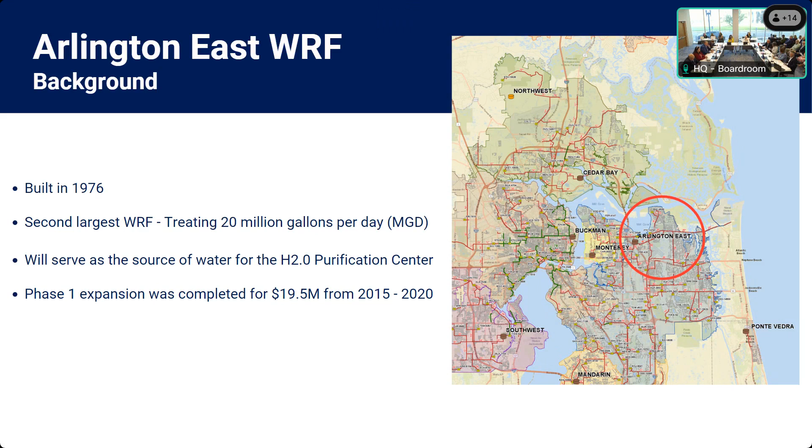Phase 2 of the plant expansion includes the upgrade of the influent structure, the aeration basin, the primary clarifiers, and the blowers. The influent structure, including the screens, the concrete structure, the influent and effluent channels, and the piping, are facing severe corrosion due to high levels of H2S, hydrogen sulfide gas.

The aeration basin, the primary clarifiers, and the blowers are undersized, so we have a hard time reaching our nitrogen reduction limits during the winter months and during peak storm events. So phase 2 will completely replace the influent structure, add a new aeration basin and blowers, and replace 2 primary clarifiers.

The design was completed by Hazen, our engineer, and was advertised for bidding in November of 2023. In January of 2024, JEA received 1 bid from Wharton Smith.

The bid was $96,857,000, 20% higher than our estimates. Subsequent reviews showed that the estimates undervalued the prices in materials and labor, and failed to account for additional efforts in site work excavation, shoring, and dewatering.

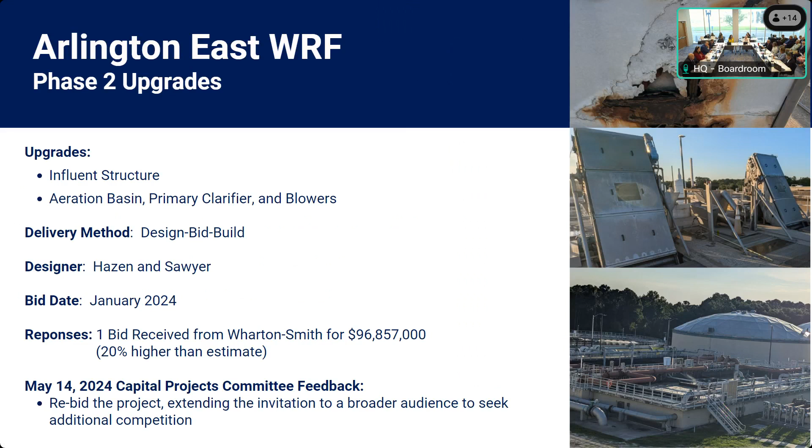The plan is to create a targeted advertisement plan to reach contractors, including those with local presence in markets outside of Northeast Florida, to hold a series of workshops with contractors to discuss the project and understand market challenges, to hold site tours and open house events at the facility to allow potential bidders to gather additional information, and to extend the solicitation duration to allow contractors plenty of time to bid.

The risks include low participation by potential bidders, as we experienced before. Large contractors that can bond and perform this size and scope of work do not often participate in hard bid solicitations. There is so much work currently available, they may simply bid elsewhere.

Option 2 is to break the project into 2 distinct projects and bid separately: the influent structure, and the aeration basin, primary clarifiers, and blowers. This will allow smaller contractors to be competitive and have the bonding and labor capacity to complete the projects. The engineer would need to revise the drawings and specs to develop separate bid packages.

The risks include increased cost and duration due to increased efforts in project management, engineering, coordination and construction, and loss of economies of scale.

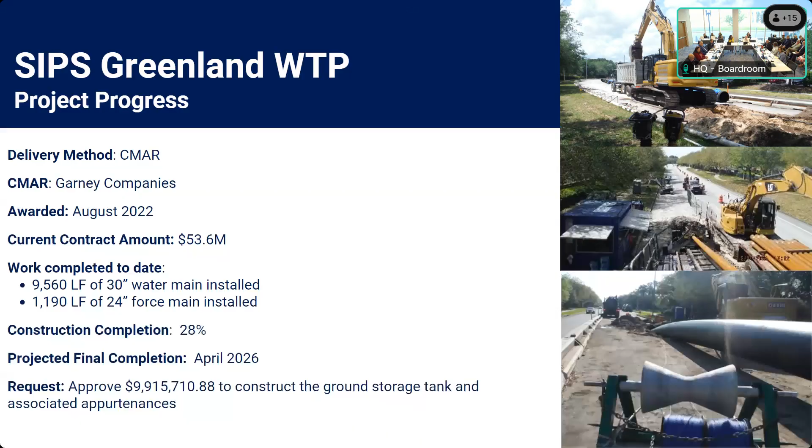That pipeline segment stopped around the Southside Boulevard Bradley Road area. So the SIPS program is, if you want to call it, a phase 2 of TWMP, but we named it different to help disassociate itself, but it is ultimately a continuation of moving water from the Main Street and North Grid to the South Grid.

So the actual Deerwood pipeline project was the first one that was started. It connects to the pipeline that was stopped under the TWMP program at Southside Boulevard Bradley Road, and then it's a continuation on down. So it's a continuation of the TWMP program that was done, which included the river crossing along the Mathews Bridge.

This is going to sound so basic that you may laugh, but is the reason we're doing this because the wells are more powerful and better suited in Main Street, or the ones on the south side are just getting stressed and need the help? Can you kind of explain the process?

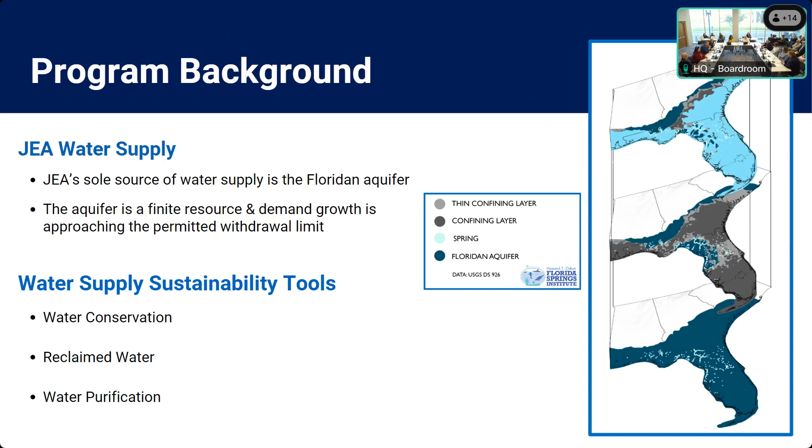It's cheaper than desalination, but not cheaper than just pumping. Correct, our cheapest supply right now is the aquifer. So when we reach that permit limit, any option is going to be more expensive than what we have now - it'll just be a smaller portion of our supply. I remember years ago there was a big debate because Central Florida was withdrawing from the river. Now is that another option? It is an option, but it's variable quality, so this supply would have a more consistent quality, which would make it less complex to treat. How about cost? Cheaper. Because it doesn't have that variability in quality.

So when our consumptive use permit was issued in 2011, we started having discussions with the Water Management District about what that next allocation of water would be. That led to us doing a plan with them in 2014 and led to JEA developing a 3-phase program for this. Phase 1 was from 2016 to 2019, and that was pilot testing. What we wanted to do was evaluate available technologies out there being used around the world for this application. We did a lot of laboratory testing, and that was all about ensuring protection of public health. That's when we also developed our initial communications plan. That was a cost share with the Water Management District for that portion of the work.

We're now in phase 2, which is demonstration. This is about optimizing the performance so we can make it more cost effective when we go larger, training staff on this new equipment, and then a visitor center so that we can engage the public and show them what we're doing with this. That is also a cost share with the Water Management District for this portion of the project, and that's what the second half of this presentation will be about. The third phase is implementation, so we'd be able to apply this full scale as demands increase in the future.

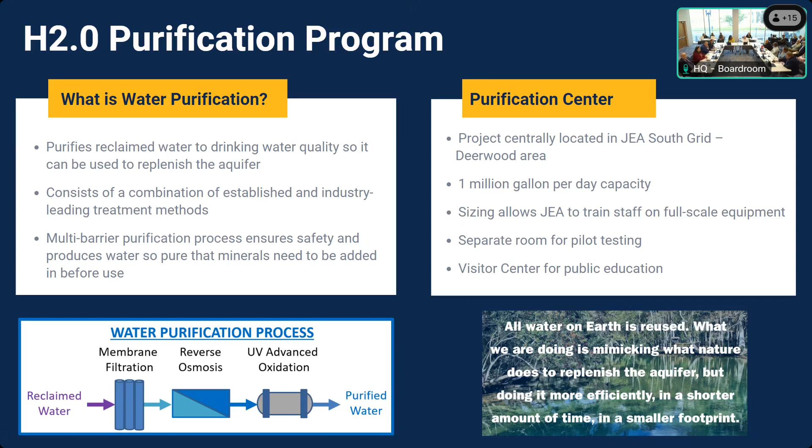Next slide. So the technology is there right now for this process, is that correct? Yeah, these projects are in a number of different places throughout the world, where people have water supply need challenges. Singapore's got a great program. The world's largest facility is in Southern California, where they purify and replenish their aquifer with more gallons than we treat and produce for our drinking water system today. So these have been used for decades, yeah.

But it's basically RO, reverse osmosis, which has been around for a very long time. But it's expensive. Relatively, when you compare it to other options, the cost has come down since RO was invented and used over time. There's been efficiencies in the application of it.

This purification program has a number of significant benefits for us and our environment. It's the most economical supply option that we have. It provides us with long-term water supply resiliency. By replenishing the aquifer with this water, it not only increases the quantity down there that we can withdraw, but also improves the quality of that aquifer supply. It provides long-term assurance of water for future generations.

This is the only option available that not only solves a water supply need, but also helps us reduce the volume of water discharged to the river. As part of our integrated water resources planning, this is the solution, as well as what you've heard with Senate Bill 64. This is a key component because now we're reusing more of that reclaimed water and reducing the discharge to the river.

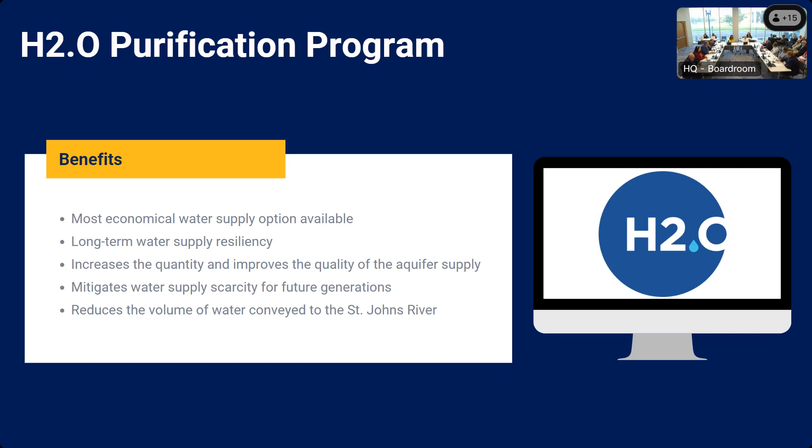So moving on to our purification center, we chose a progressive design build delivery method that was awarded to the Haskell Company and their partner Black & Veatch as their engineer. That was in October of 2019.

The board approved the property purchase for this site in September of 2021. We're currently at 30% completion. You can see the photos on the right of the walls and piping in the ground.

Final completion is scheduled for October of next year. Current contract amount is $78.9 million. This request is to approve $4,639,615 for a degasification and remineralization system, associated appurtenances and finishes. This work was in the original scope of work and it's in our budget. It just took the contractor additional time to develop these to the point that they could bid them.

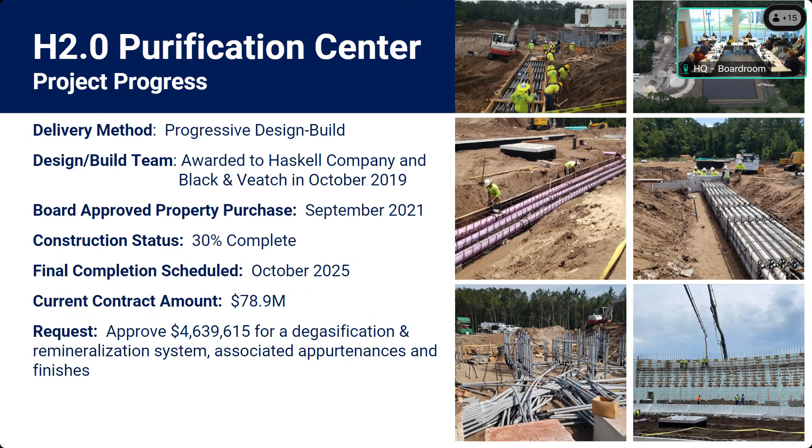Where exactly is this facility? It is in our South Grid, off of Southside Boulevard, just south of JTB.

Staff is requesting Capital Projects Committee recommend the board approve an award to the Haskell Company for the H2.0 Purification Center. This award includes the construction of planned and newly designed degasification and remineralization system, associated appurtenances and finishes in the amount of $4,639,615, for a new contract amount of $83,506,772.37. Ryan, have you all reviewed this for competitive pricing?

Make sure you're okay with these numbers. Yes, the pricing for this came in about 30% lower than what our estimate was.

Praise the Lord. Move approval. For once. We've got a motion. I second it. All in favor? Aye. Thank you. Thank you.

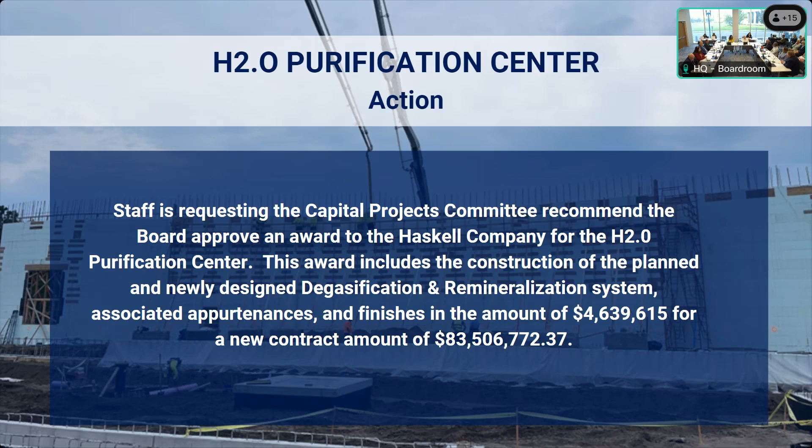Back to you, Ray. Thank you, Chair Baker. So this project right here, this is a new project, Northwest Water Reclamation Facility, which is in the planning phase. We're bringing this to the committee not as action, but as information, for awareness, so you know that this is happening.

This new facility is to support growth in Northwest Duval County. The initial size is 2 million gallons per day. The planning level estimate is 120 million, and it's projected to be online at the end of 2028. The projected build out for this facility is 9 million gallons per day.

As far as design is concerned, the engineer that has been selected is Hazen and Sawyer, and their services will be conducted in 3 phases. The first phase is preliminary design, with an award amount of about $2.4 million. After that is phase 2, the more detailed design, where we'll determine what type of delivery method will be utilized. We'll be coming back to this committee for input.

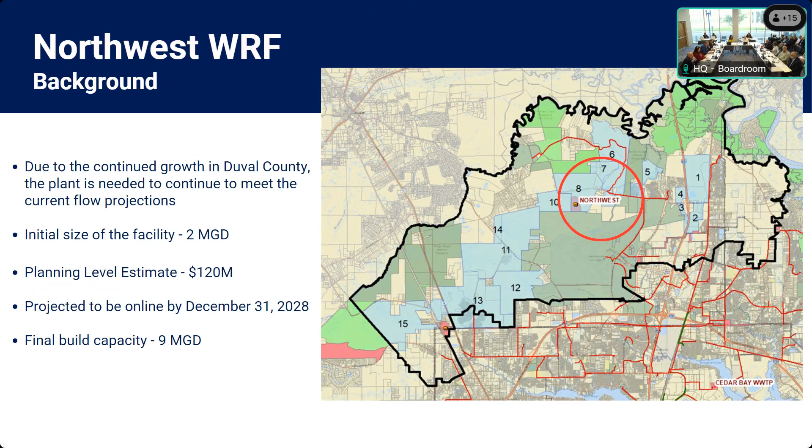Okay. All right. Ricky, morning, morning. Chair Baker, members of the committee, I'm Ricky Erickson, Vice President Electric Systems.

Hear me okay? We're on. To make sure everybody hear me. Yes.

Here today to present an update on a combined cycle, kind of moving to the design phase. So I'm here substituting for Pedro. He has an obligation he couldn't get out of today. He is performing his civic duty today. So I'm here pinch hitting for him.

We'll give you an update of our plan, and Kevin will also talk about the greenhouse gas rules, some of the potential impacts of the greenhouse gas rules, and we'll go over some of the market test observations and considerations that we're going to be going through as we go through this process.

So we have some significant milestones and activities going on. After the March 26th update, the team continued with the implementation plan and assessment of the new greenhouse gas rules and their impact on JEA. The main objective is to inform the Capital Project Committee of the next market options, the request for proposals, and how JEA is accounting for the new greenhouse gas rules in the need for power process.

This graphic, which was provided at the March board meeting, illustrates the significant activities related to the project, plan timelines, and when the Capital Project Committee and board should be receiving updates from the team, as denoted by the green diamonds. The gray status shows where we brought it to the board in March.

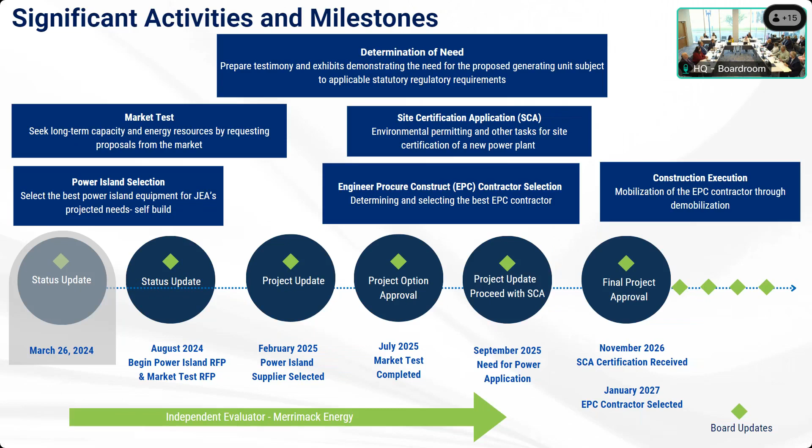I thought we were still evaluating, making sure that this was the best approach and so forth. It is, this is part of that approach. So by doing this, we can compare and send to the market what we have established, so we can see if there's any more competitive projects that can come in and maybe beat it. So this is kind of a standard to evaluate against. All right, this is still the evaluation stage. Still evaluation stage, okay. And the assumption based on what these things cost is that we think this is going to be the best solution. And I'm leading the witness a little bit, but the greenhouse gas regulations that have come down from President Biden throw a monkey wrench in this. It has forced us to do some more studying to see how the impacts are going to impact us in particular, and that's what Kevin's here to go over.

Okay, I just wanted to introduce you properly. Thank you. Yes, this is Kevin Holbrooks, Director of Environmental Operations. Just a quick refresh - I know we touched on this at the last meeting and everything about it, and just wanted to do a real high-level recap.

It's about 800 pages, we're going to do it in one slide. Bottom line, on new combined cycles, you're going to be limited to 40% capacity. That's how much you can operate the unit, unless you install carbon sequestration.

As I indicated before, on carbon sequestration we're undergoing a study right now. We just initiated it to determine the feasibility of carbon sequestration in our geological formation in Northeast Florida. If it's feasible, that's great, we could probably inject it underground. If it's not feasible, then how much is it going to cost us to pipe it if we had to do that?

The good news about this rule is there's flexibility. The models seem to indicate that we still need a new unit, even if it was capped at 40% capacity. The good news is if carbon sequestration is viable in the future, we can install it and increase that capacity factor to 100% if we needed to.

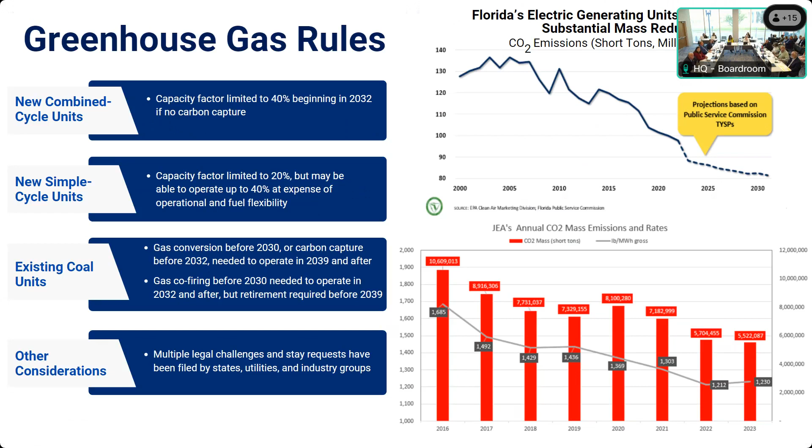Oops, do we- can you go back? When we buy off the grid, do we figure in the carbon on that, or is that a freebie?

Interesting point. On other pollutants, it's always the source, the generator, that's responsible for those pollutants. And that's kind of how we've done the greenhouse gas, so it comes from the generator. It's actually from the source, it's source specific.

I don't know, that could change. The rule doesn't specifically state anything about that, who's ultimately responsible. So just keep me from being confused.

The 45% we've saved doesn't take into consideration the fact that we're buying it from FP&L and bringing it up. I mean, is that how we saved it, by buying it from FP&L instead of just producing it ourselves?

Well, Ricky can answer the capacity situation, but getting rid of the coal units, which are higher producers of CO2 emissions, and using Brandy Branch and our natural gas units more has caused savings in this. Yes, there are some purchase power agreements you could point to, but out of that 40-45%, maybe 10% is because we're purchasing power, and the other 30% is because we've reduced emissions from our own facility.

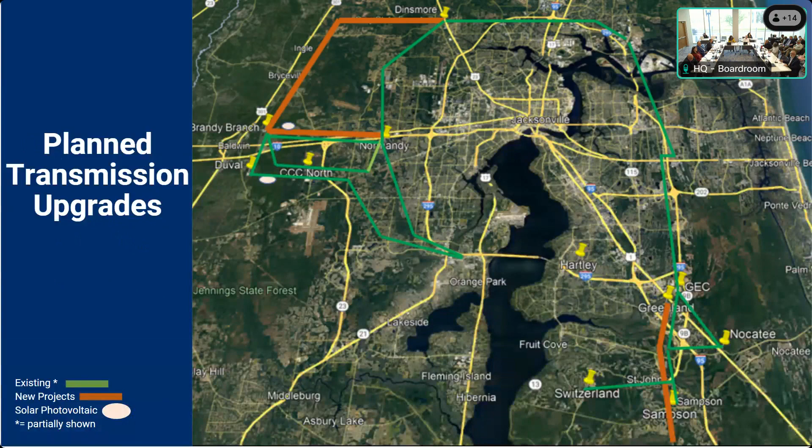So this is our planned transmission upgrades. This is one of the ones coming from west to east that I mentioned. It continues to be a concern as we import more and more power. We interconnect with one of our peers, FPL, on the west side of town. It's a 500 kV system that we own part of, which we talked about earlier. This is where a lot of our import energy, market energy, comes in basically from the west side of town. As we continue to depend more and more on the grid, this yellow line represents our facilities between FPL and ourselves, where we import a lot of our energy.

As we continue to import more and more solar resources, this corridor tends to have more and more contingency problems. The study identified this as a potential area which needed to be mitigated. One of the mitigations for this is to increase the capacity of these lines. The existing corridor is already established, so no real estate should be needed. These lines will just be increased capacity to ensure that we can import the energy that's in our plan.

The yellow ones are where we're beefing it up, and the green's just existing facilities, sir.

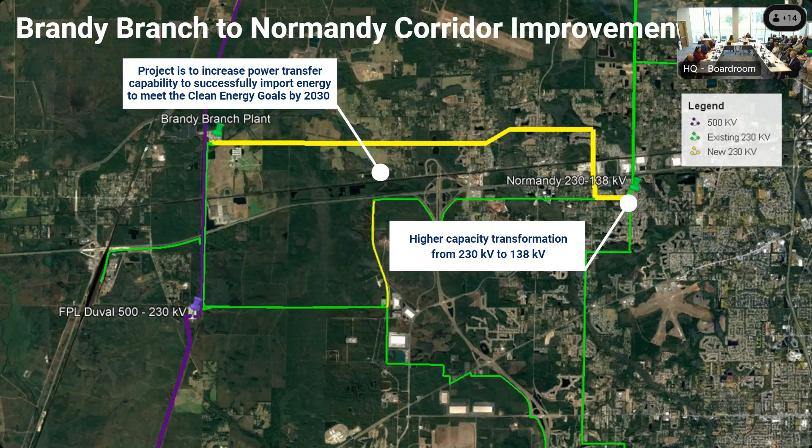That is not the only issue in getting power from elsewhere outside of our system into our system. So upgrading those lines helps, but creating a diverse path is really the way to handle all those particular contingencies associated with that item.

So this project would produce a separate, diverse geographical path to import power into our system. This is from basically Brandy Branch to Dinsmore, which is a 230 line being proposed to inject power directly into our system around Normandy. Normandy is where these lines are going today, and it's been one of our lifebloods for years. As we import more and more power, and that's what the 2030 IRP shows, we need another diverse route to ensure reliable transmission of that power. So that's what this project is - to create a path somewhere from the west side around our system into a new injection point to get it to our customers.

And we have to buy the land for that? That's a real estate acquisition, yes, or an easement. We may have to go down public right of way or down a road or buy some sort of real estate. How far along in the planning are we on that? Very, very initial stages on this one. We haven't bought any right of way, nor have we done any design on the line yet.

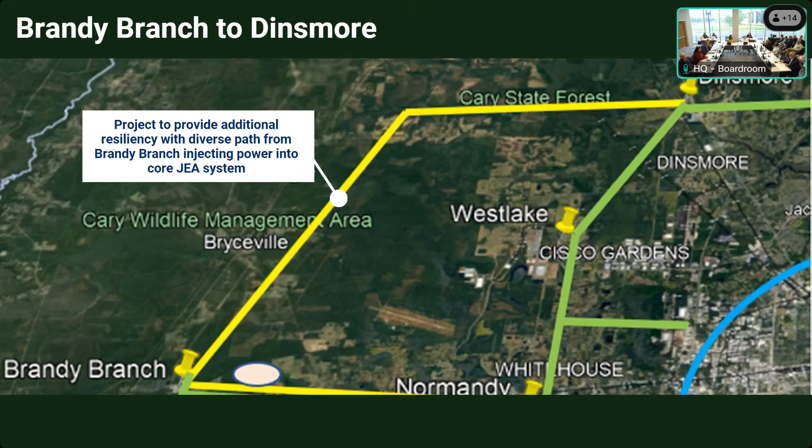So also to increase that import capability on the south side of town, we'd add a second tie line to our FPL counterparts south of us. While the majority of it comes in from the west, some comes in from the south under these scenarios we're talking about with increased imports. So another line on the south end of town is being identified as a need to ensure we comply with all the contingencies that are studied. And again, this one hasn't been designed, this is just in the planning phase.

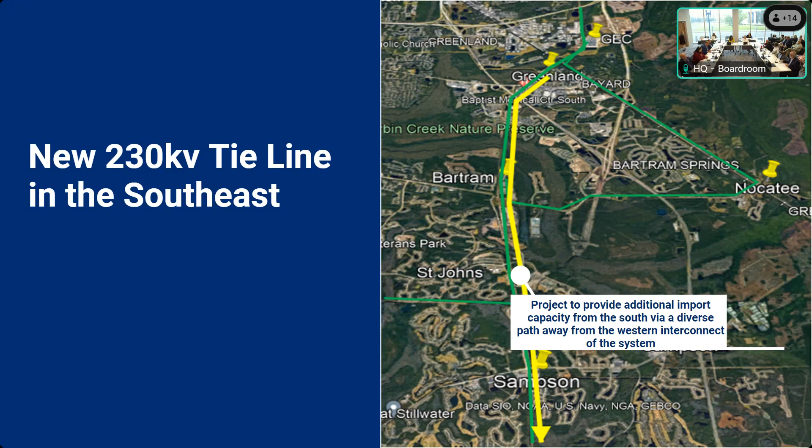I really appreciate hearing about these projects at this stage instead of at the 'oh my god, how much does it cost' stage. Thank you.

But just to warn you, none of these are cheap either.

So some of the other improvements - I talked about the transformation 230 to 138 on our west side. Well, there's some on the south side as well that have shown would need to be increased in capacity. So this is just showing those two particular units that would need to be upgraded as well. There's one at our Hartley substation - the transformer is at 230 to 138 there today, it just needs another one, just the ability to carry more power through it. So that's what these two here are, Greenland and Hartley.

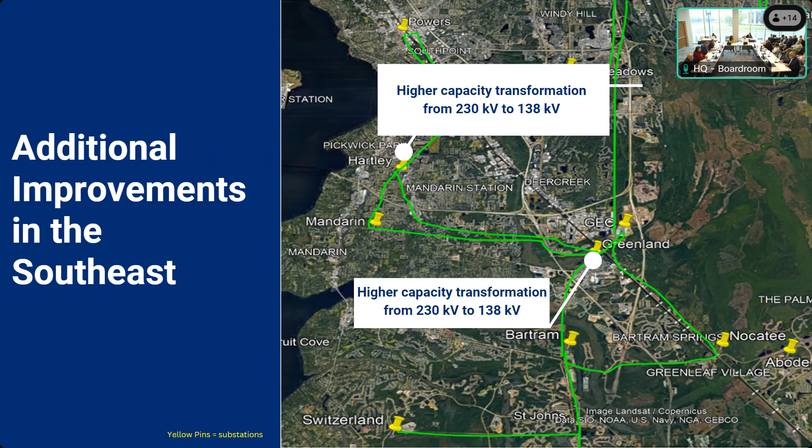So that kind of wraps up the large scope concerning the IRP. There's some other projects we'd like to go over, but any more questions on those?

So on these, there's a lot of planned projects in the downtown area. There's some industry looking to come in between the stadium and the river in that area, some other apartments - there's all kinds of projects being proposed for the core 69 system, in particular downtown. So that's adding more and more demand, more load in our 69 system downtown. As such, if all these projects come through and get built and put in service, that's going to require us to get energy to serve them. Well, as you see, most of our resources are not in the 69 system, so how do we get that energy from our resources to these customers in our downtown core system?

So these projects here are very, very preliminary, but also are to meet that demand that's been projected. If that demand doesn't come to fruition, some of these probably won't happen, but this is what's on the books today, and this is our best thoughts today of how to meet those increased loads.

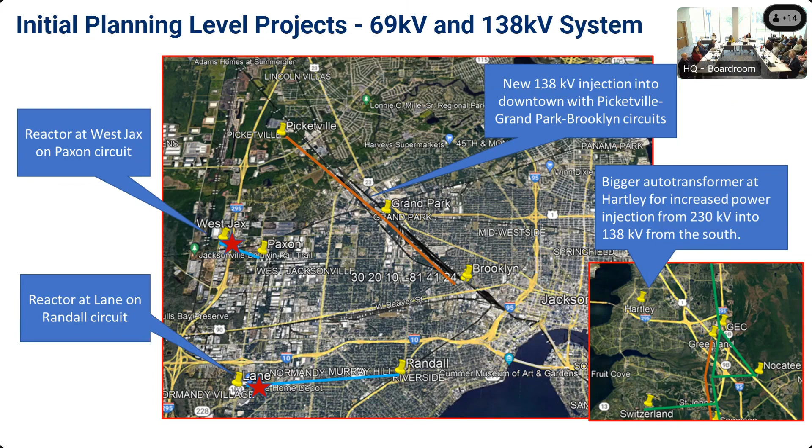Thank you. And that's all I have unless there's questions. Thank you, Ricky, thank you sir. And I'll tell Pedro he got lucky today. Now, we're inviting you back, but we're tired of Pedro. Thanks sir, you have a good day.

Okay, Ray? Yes sir, last item on the agenda. So y'all may recall at the last board meeting, the delegation of authority is 50 million and above for capital projects, but there is a request to identify those capital projects that were 25 million and above.

And so this is our first pass at doing that. So this is for information. And if you could go to the next slide please, there is an actual list that is included in your supplemental materials. It is a color-coded list, and it includes FY23 year-to-date expenditures, FY24 forecast, and FY25 forecast.

So we took a snippet and we call those our active projects. Of course, there are projects, kind of like what Ricky was going over, that's a study that's going to end up being projects in later years and what have you. But we wanted to put before this body those active projects right now, and also kind of put before you what will be coming to you as future agenda items and what has already come to you.

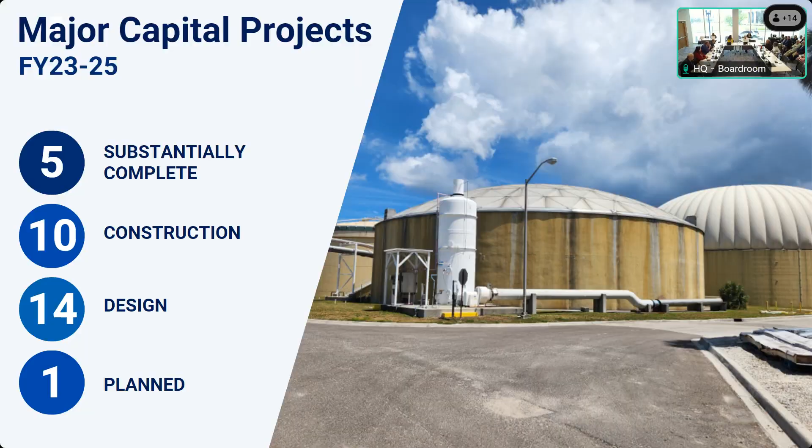Do we have any old business to come before the meeting? I don't have old business, but I would like to compliment Ray and her entire staff. This is the guts of the operation. Everything's important, but as you said, hope is not a strategy. And I hope you see how long-term the entire team looks. Every area in JEA is looking long-term, and it will change.

But this committee will always be abreast of what we're thinking. It will be dynamic, it will change, but you won't be surprised. And hopefully you'll be better prepared if and when things do come down the pipe. So thank you, Ray, and thank you everyone who worked on this committee meeting. Very well done.